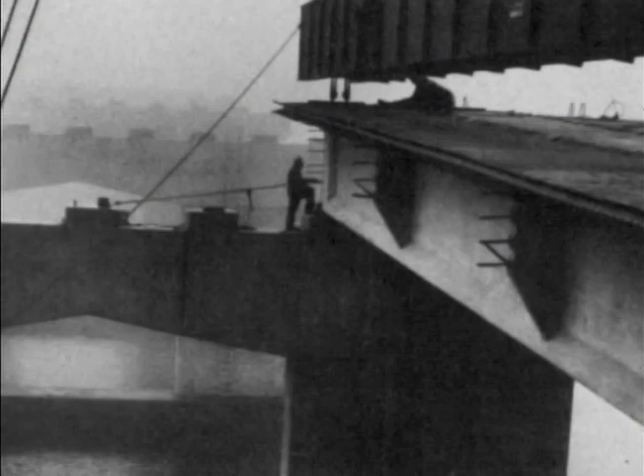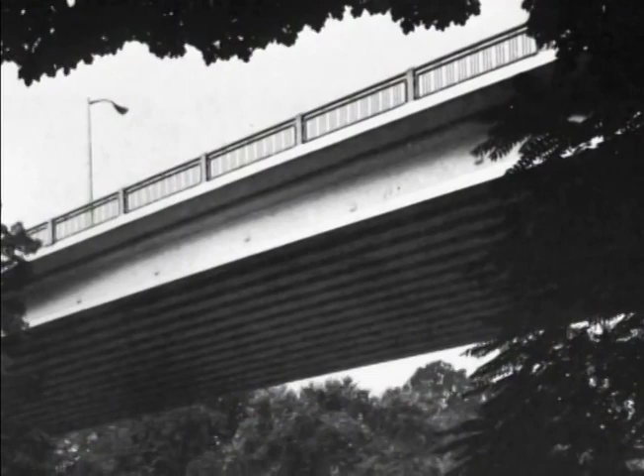Who would have dreamed that the introduction of a new application of concrete to American construction would become the foundation of 50 years of human daring, risk, and innovation? Who would have imagined that the 1950 construction of the Walnut Lane Memorial Bridge in Philadelphia would so dramatically change the thinking of American engineers and designers?

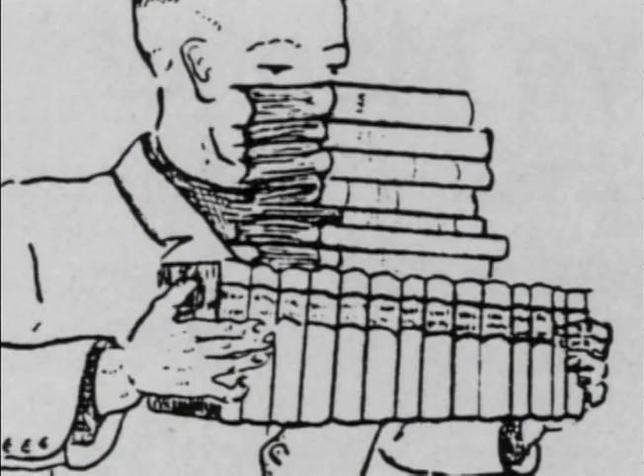No single event was more instrumental in launching the pre-stressed and precast concrete industry in North America. And no person was more significant in making the Walnut Lane Bridge into a reality than Professor Gustave Magnel of Belgium. A charismatic, dynamic engineering genius, Magnel developed the concepts for pre-stressed concrete while at the University of Ghent. He brought his ideas to America during a visit in 1946.

Charles C. Zollman, a former student and a Pennsylvania consulting engineer, worked with Magnel, and together they outlined the benefits that pre-stressing would provide to concrete components. Their report led to the testing of full-size bridge beams developed by Magnel. Zollman then worked with Ted Goot of the Preload Corporation and officials in Philadelphia's Bureau of Engineering, Surveys, and Zoning to create a design that took full advantage of pre-stressed concrete's benefits.

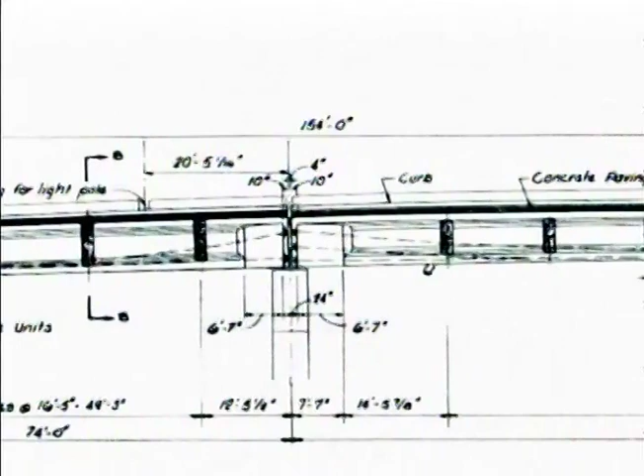Bids for the project were taken on January 19, 1949. The contract was awarded later that spring to the Henry W. Horst Company in the amount of $698,000. Interest in the project was extremely high. More than 300 engineers from 17 states and 5 countries watched a test of a girder like those used in the Walnut Lane Bridge's main span. The project proved to be an unqualified success.

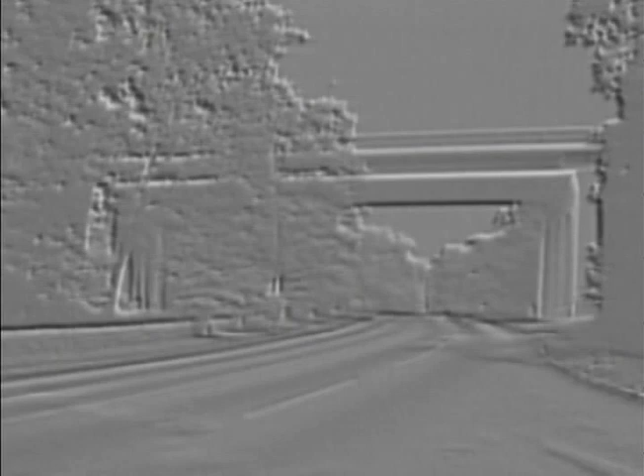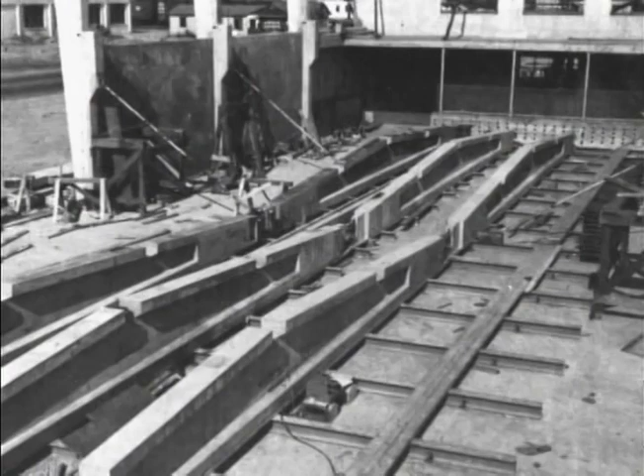The Walnut Lane Memorial Bridge met a variety of challenges and proved that pre-stressed concrete could provide benefits unmatched by any other material. It was the culmination of many innovations developing around this new technology during this period. For instance, as early as 1944, the first technical committee on pre-stressed concrete was organized by ACI and ASCE. Then, in 1948, the first stress-relieved wire was developed by John A. Roebling and Sons Company. And in 1949, Concrete Products of Pottstown, Pennsylvania, created the first pre-tensioning bed to make pre-tensioned bridge beams.

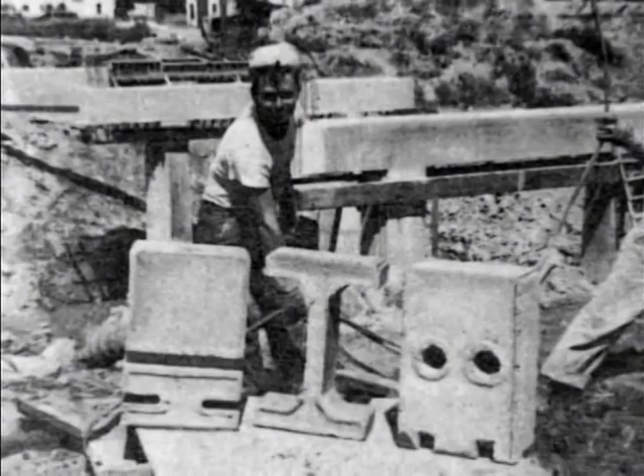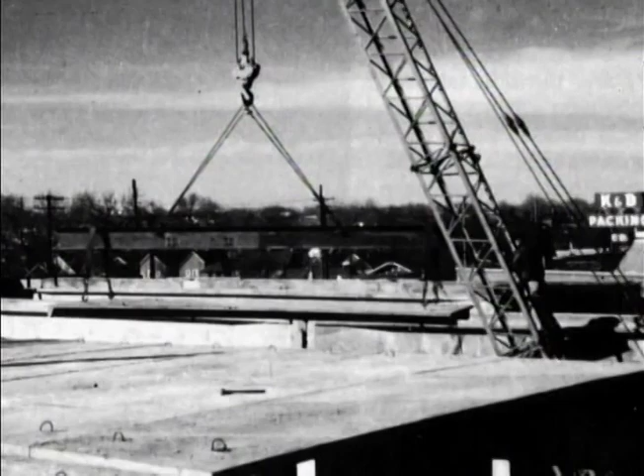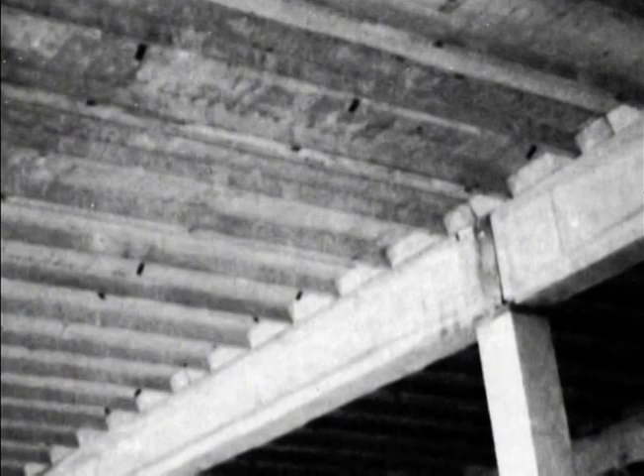Soon came such innovations as the Michigan block beam system, which required only 3 components to produce. The first pre-stressed girders designed for a building were produced in 1951 in Tulsa, Oklahoma, using button-headed linear pre-stressing. That same year, in Tacoma, Washington, Anderson Brothers built their pre-stressing plant. In 1952, Prestressed Concrete of Colorado produced a double T design. Marketed as the Twin T, it was first used for a cold storage warehouse for Beatrice Foods. It allowed larger spans between beams and remains a key component design to this day.

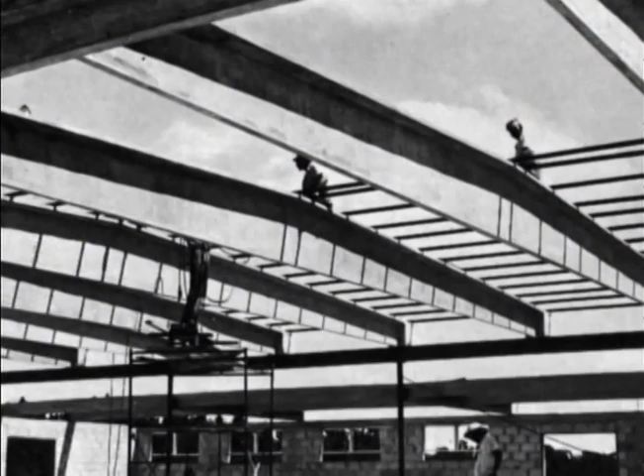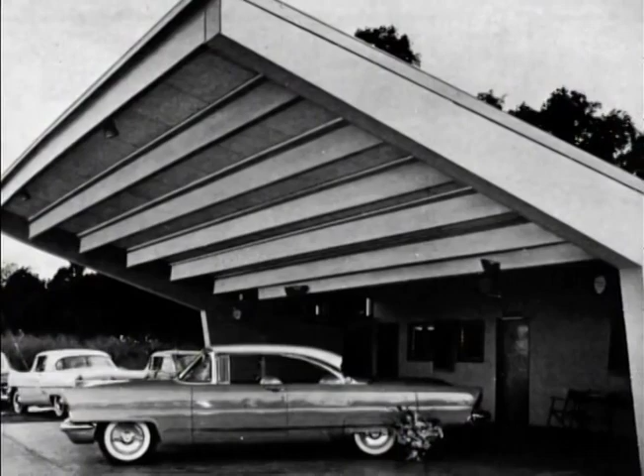The Arroyo Seco pedestrian overpass in Los Angeles marked the first use of pre-stressed concrete in California. It used a post-tension stressing system developed by the Pre-Stressed Concrete Corporation of Kansas City. In Florida, there were innovations such as 60-foot pre-tension warehouse beams, new pre-stressing facilities built by Florida Pre-Stressed Concrete in 1953, and innovative ideas of all sizes and shapes. A variety of bridge designs were created in Florida, spearheaded by the Tampa Bay Crossing in 1951, which sustained the momentum of the Walnut Lane Bridge.

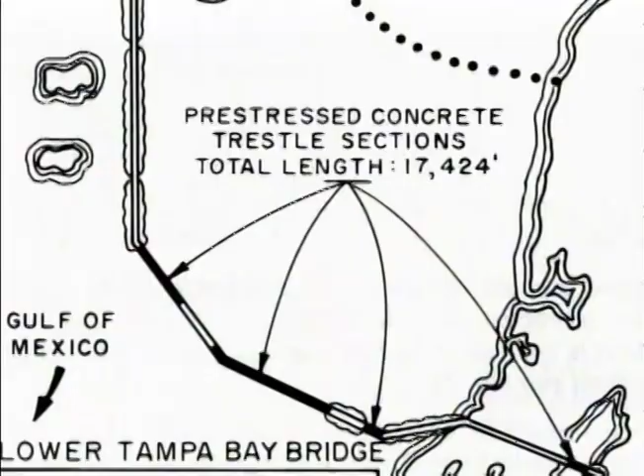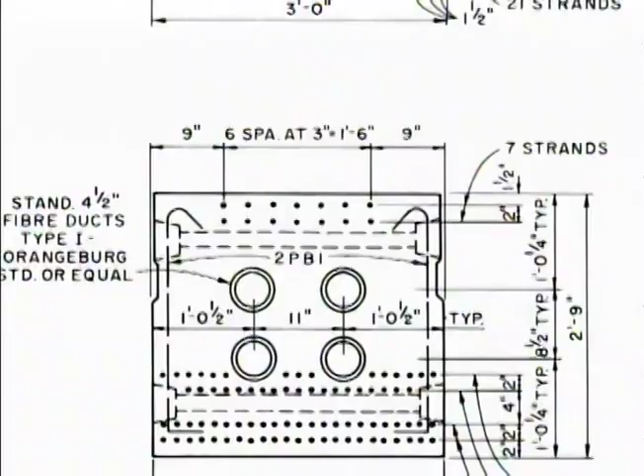During this time, box girders for short spans were designed that took advantage of sonovoids. Testing these box girders in the early 1950s led the Pennsylvania Department of Highways to approve the use of pre-stressed box girders for 6 expressway overpasses in downtown Philadelphia in 1955. The project marked the first ever large-scale application of box girders in the country.

Throughout the 1950s, pioneers in the pre-stressed concrete industry continued to expand the material's design capabilities. One was Harry Edwards, president and founder of Leap Associates, a consulting engineering firm in Lakeland, Florida. Founded in 1950, Leap has concentrated its services almost exclusively on the development and promotion of pre-tension concrete and the computerized analysis of pre-stressed concrete structures.

Another early innovator was consulting engineer Ross H. Bryan of Nashville, Tennessee. Bryan designed the first linear pre-stressed structures in the U.S., as well as the first structures using deflected pre-tension strands.